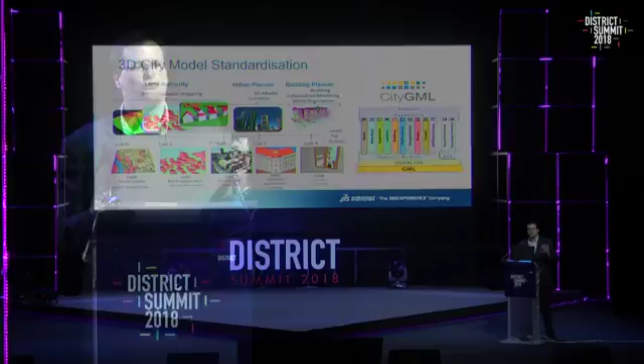It's what we mean by the terrain. And the terrain is very important for most cities because it's describing the elevation of the land use. So you can start to simulate flash flooding, you can start to simulate a lot of things such as excavation. So the terrain is very important because with the terrain, you have access to the road network, you have access to the green area, the blue area, and you can start to do your planning from an urban master plan perspective.

After, you have what we call the city in white, level of detail 1, meaning that you have the correct geolocation of the building, X, Y, Z, and the correct elevation. So you know where the buildings are, and you start to have some information regarding positioning. With that kind of building, you can do some wind simulation, noise simulation propagation. So you have a level of detail that supports usage to be much more innovative when you want to deal with problem solving.

After, we jump to what we call level of detail 2, and it's starting to be very interesting because when we are describing a city in level of detail 2, it means we have information on the walls and we have information on the roof. And when you have information on the roof, you can start to simulate the solar potential.

LOD3 can add some other information in terms of semantics because you have some architecture details, such as the windows, such as the doors. So now when you click on a building, in a virtual world, you know the story, you know the lot, and you can know some information such as solar exposure or people that are living in that apartment.

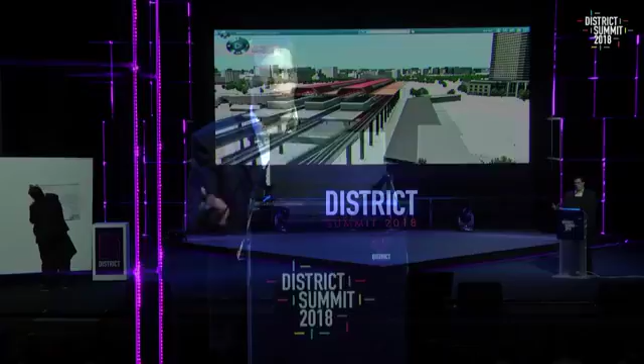Pay attention at the MRT station that is in the middle. At the moment, it's in LOD1. We put it in LOD4, meaning that now we can go inside. And when you can go inside, you can experience in a virtual environment what will be the experience from a citizen willing to take the MRT.

And you can change a lot of things. You can change the way the panels are put in place. You can change the landing, the unlanding. All the information can be simulated.

This is very interesting for your urban planning environment or bureau. You put the master plan, so you aggregate all the information from the legacy system into a 3D environment. To get a sense of this information, you can superpose it with information coming from satellite ortho pictures. You can put texture on the building.

Now it's very interesting because you have a referential of that city that can support scenarios. First scenario: analytics, semantics. When you select a building, as I mentioned already, you have the window, you know the solar exposure, you know the address, you know the elevation, you know a lot of information. You have also access to what we call the standard information.

So when you select a building, you have access to the volume of that building. It can be linked to some initiative strategy. But you also have access to the roof area—very useful information when you want to deal with solar panel potential.

When the information is not in 3D, it's not a problem. Look at the car park: we know how many car lots we have on a dedicated parking, and then we can start to support a smart parking initiative.

When you have this virtual representation of Singapore, you can deal with simulation. The first one will simulate a gas leak. We won't see the gas leak as a physical simulation, but we'll manage the impact of this gas leak on the surrounding environment in order to plan the evacuation.

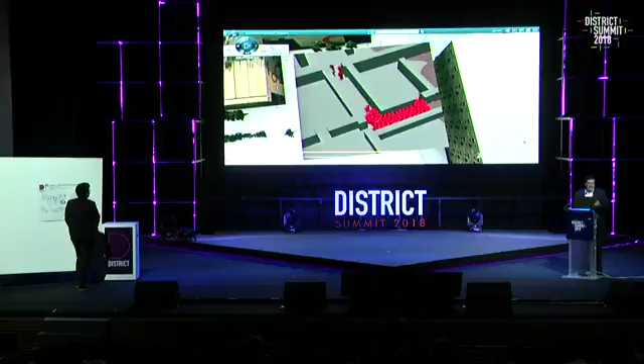It was mentioned this morning, but when you have a walkable model, then you can do what we call a behavioral simulation. You put a behavior to people in the virtual world and simulate an event. Here we're simulating a fire event, and we see how people are reacting, the level of stress, the families trying to link together to escape.

Last but not least, wind simulation. This is very important in Singapore, because temperature is 30 degrees all year long, and humidity is 90%. When you start to have this wind simulation in your planning job, you can take benefits of what we call the natural cooling effect.

So roughly, this is the first view of what we do in a virtual world for Singapore. And now, when you have this virtual twin, you can start to play other simulations.

The first thing is accessibility. This morning we were talking about topics—first one was mobility, second one was environment. For mobility, there is a law in Singapore that says everybody must be within 10 minutes from public amenities.

So here we have a path planning: I can walk, easy, I can cross. And now I'm a disabled person, so I'm in a wheelchair. The time to reach my community center in the middle is now 20 minutes, and it's more than 1 kilometer. So how do we put innovation to design a new district and a new way to move in that district?

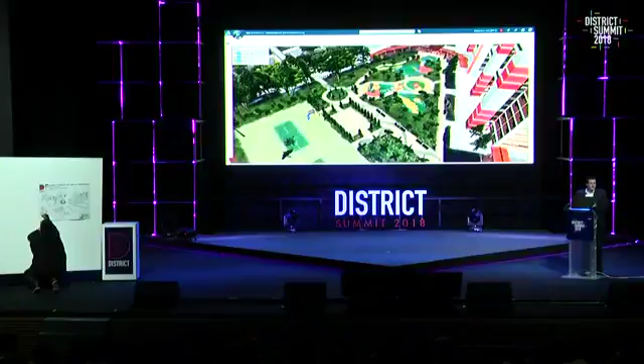So in a digital world, let's say I'm an urban planner in charge of mobility. What I can see is I have access to all my tasks, my virtual environment, and I can be notified that the town council is looking at a new project for a city garden. In the virtual world, I can put the project in my environment, start to navigate inside, and see the impact.

I can remove the trees—everything is an object—and I can see that my pedestrian overhead bridge here may have an issue, because I'm in charge of mobility and I need to put a ramp on all the pedestrian overhead bridges to ease accessibility. When I'm doing that, it's not commissioned yet, but in the virtual world I can see the impact of my ramp on the surrounding environment.

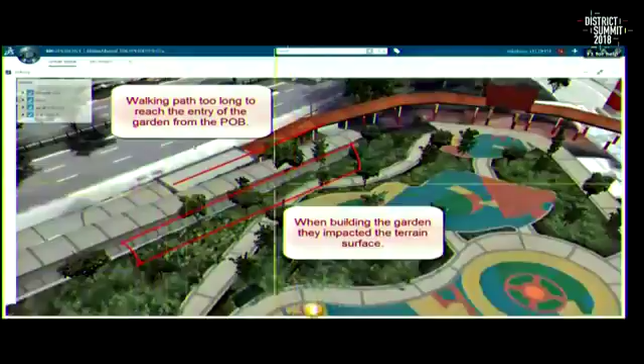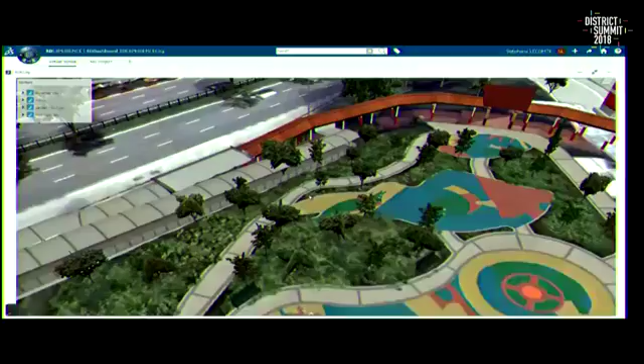And I can start to launch what we call virtual collaboration, to enable people to share information and lead to a better solution, taking into account regulatory compliance. I'm compliant because I can do things, so I'm collaborating—I have access to all the projects. This is what we call life cycle management. We also have access to all the rules.

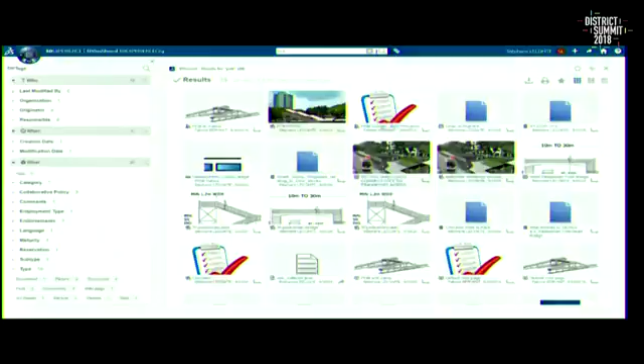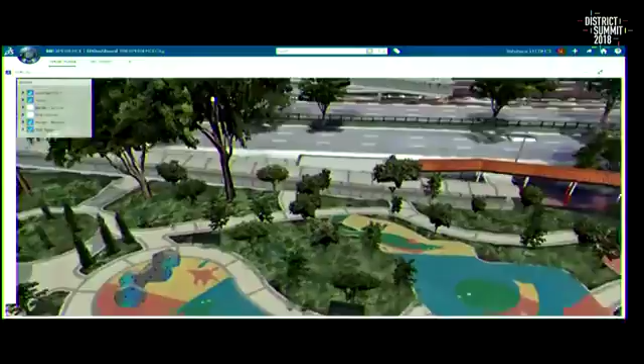So when I want to take benefit of many initiatives, here I'm connecting to Virtual Singapore, and you will see the solution that has been deployed in respect with the regulatory compliances put in place in Singapore. And the solution is very simple: 2 new paths in the garden and 2 new openings on the ramp. This is the result of a collaborative work.

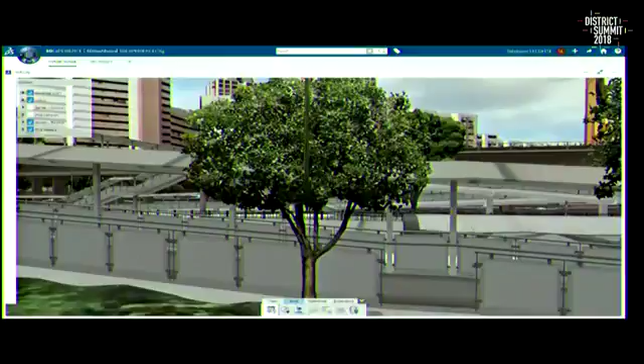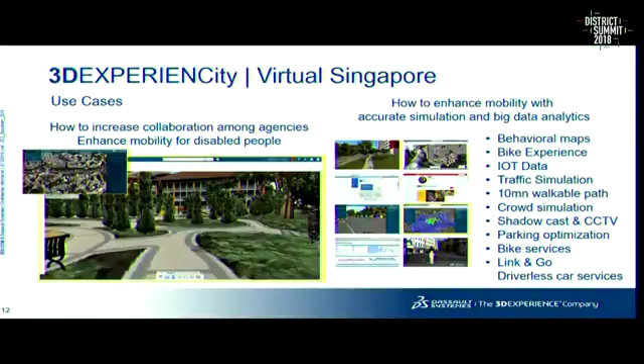And after, the benefit is that you can use the virtual environment that was used for the planification, for the citizen communication and the citizen mediation—because you have the virtual park with the virtual amenities and the virtual environment.

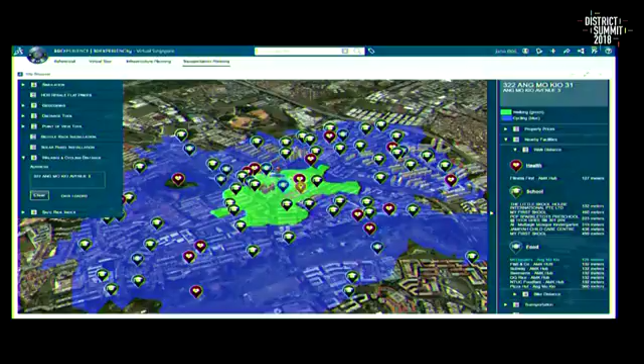Very important when you want to plan is you need to have what we call isochrone, linked to mobility again. So let's imagine here in green, what we did, we digitalized the law. In green, you have what you can access in 5 minutes by walking, and in blue, by cycling. You see, it's not a circle, it's what we call an isochrone. And it enables us to start to link, to deal with planification.

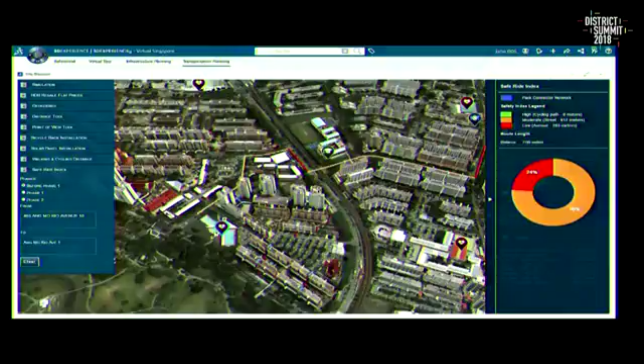So here, we have what we call in Singapore a car-lite initiative, and you can have access to a safety index for the path to move from my house to a community center. And you see that when you take into account the different phases of the plan for mobility, you see the impact on the result.

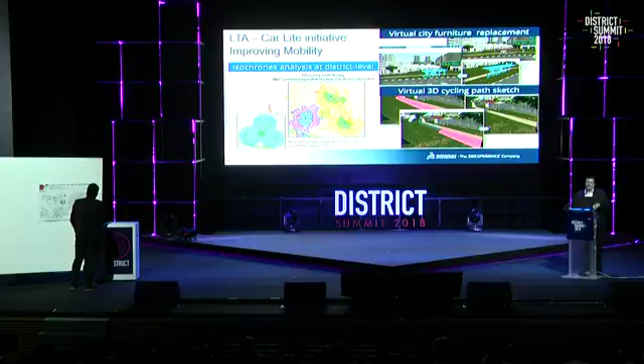Another initiative based on that isochrone: if you look at the bottom left, when you do planification, generally speaking, we say what I can reach in a given amount of time is represented by a circle. But when you do so, you don't take into account the bus stop, the underground tunnel station, underground path, whatever. So you don't have access to the real accessibility of your district. You see that if I do my planning using a circle, I'm in a perfect world, but in the real world, with the isochrone, I have a hole.

So I'm using this environment to compute what needs to be done, and after I can virtually commission new city furniture, bus stop, but also a new cycling path.

Linked to smart campus, so we'll move to the environment side, it's no more mobility. What can we do in the virtual world with green energy?

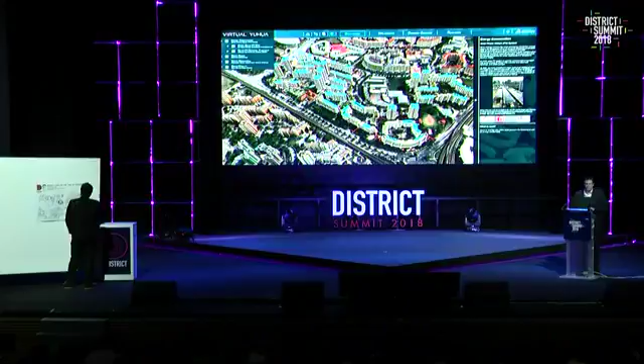We digitalize the solar panel. So for a district, the town council can have access to the solar production and also the electricity consumption from the common parts, the lift and the stairs and the light for the park. And you can learn from experience.

You can see, okay, now what if I want to replicate this solar panel initiative in another district of Singapore? And because we know the position of the building regarding the sun, we can assess a solar potential and help the decision process to say whether or not it is cost effective to deploy solar panels in that area.

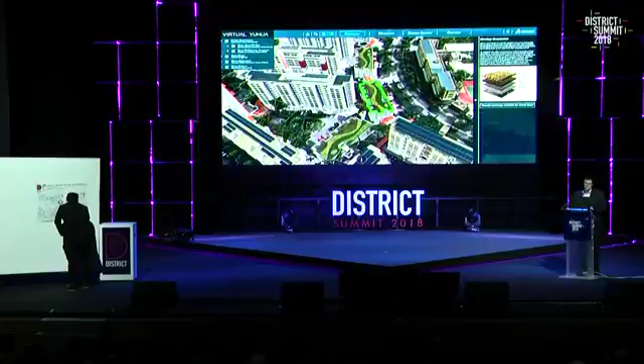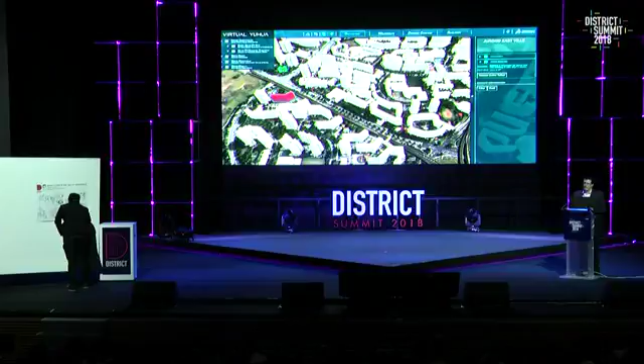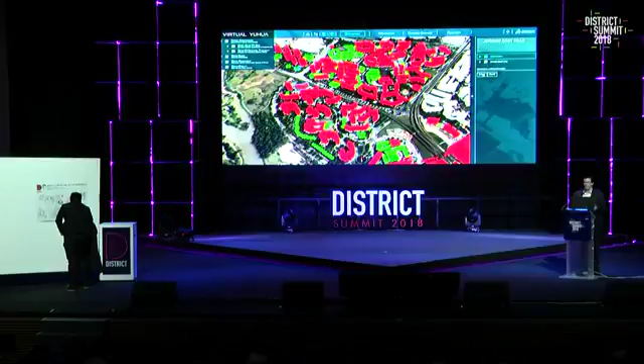Here, we digitalize the rules again. When you cannot put a solar panel by law, you can put a green roof. And now we can have access to a rules-based master planning saying where are the buildings that are candidates for a green roof. In a matter of clicks, you can see all the green candidates where I can put and deploy this kind of initiative. It's very helpful for master planning in order to deal with that kind of environment.

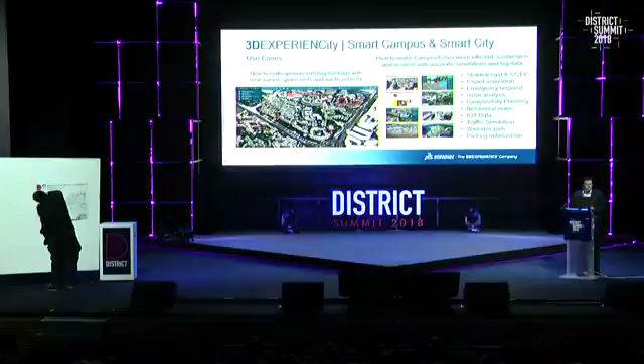Here, it's what we call a pneumatic waste collecting system. So to ensure that all the public housing of Singapore are connected with pipes in order to collect the waste to a central repository. In the future, it will optimize the use of the fleet in order to take care of the waste.

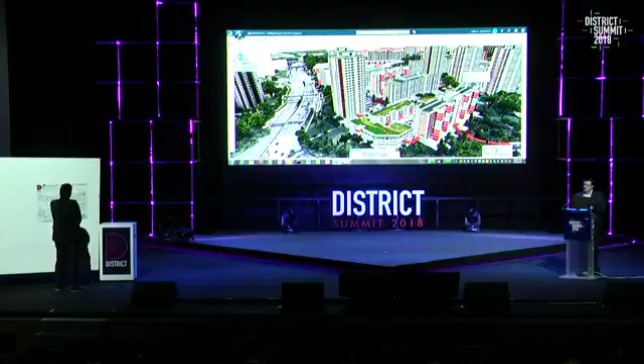When you have this virtual model at the district level, when you want to link with security and safety, you can simulate the field of a CCTV network, and you can help optimize the position of a camera based on the elevation. You can also simulate, as you saw previously, the season, and you have access to the shadow. Everything in a virtual environment.

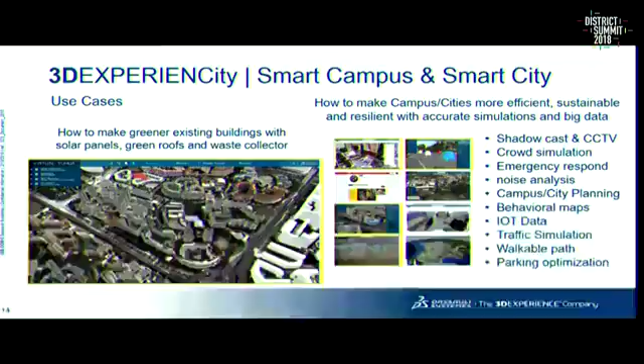Last but not least, simulation. So here we are working in partnership with Singapore University and Research Institute, and you have the result of a traffic simulation in a district, and you can go at the pedestrian level to have fields on the congestion.

On the safety: can I cross the road at that moment? Do I have enough time to cross? Because in Singapore, all the traffic lights are connected, so when one is red, there is an impact on the network. And you can simulate these kind of things.

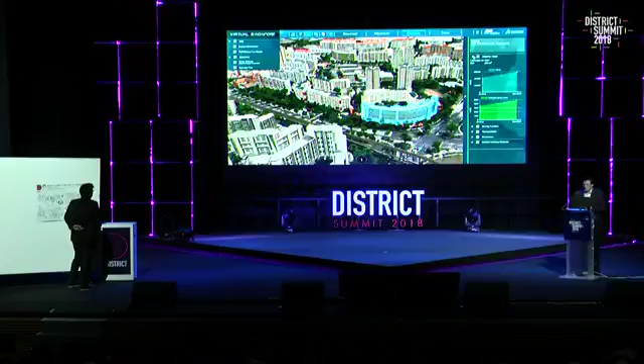Back to simulation. I don't know if you have it in Thailand, in Bangkok, but in France, we have it also: we are managing all the transactions on property price. And here, what we are doing, we are aggregating all the information on the price transaction for a dedicated building, and we can compare the price based on the different stories, and you can detect some patterns.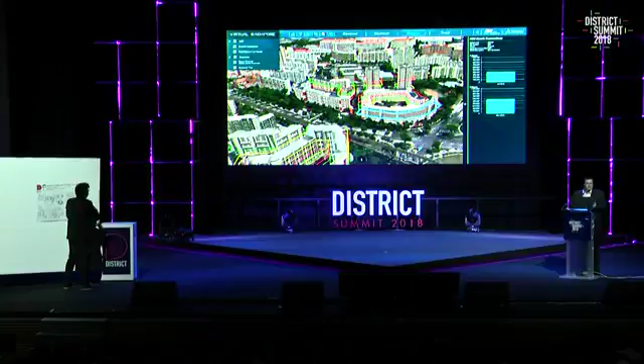And you can, after, play other simulations to enhance the way you want to deal with the district plan in order to attract newcomers. You need to find the cause why there is a drop in the price, so you can aggregate multiple simulations. Here you see that you can have the simulation for the price and all the transactions. But now we jump to what we call a noise simulation based on sensing data, because we have sensor data on the smart light, smart lamppost in that city.

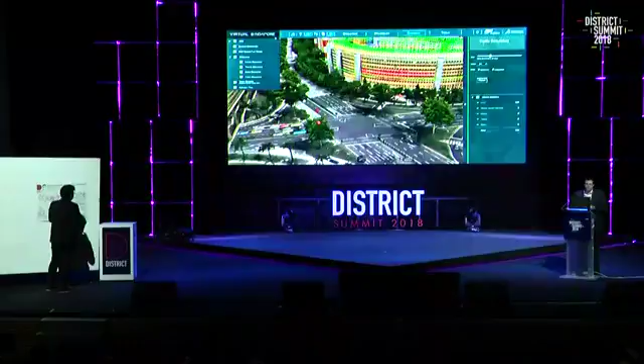So we are able to aggregate all the information on noise. And when you put the price evolution, the noise simulation, plus the traffic together, you can detect things to be done at the master plan level.

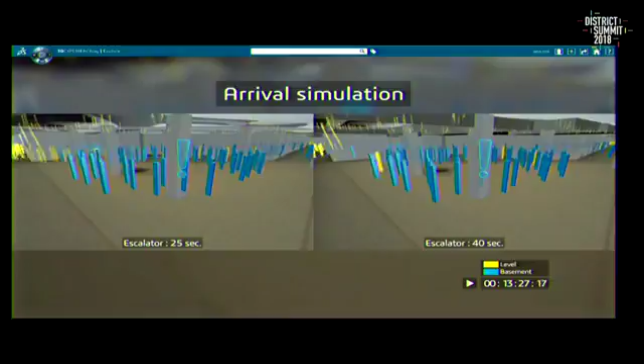Back to the walkable model. This is a shopping mall in Singapore, and here we simulate the way people can come to an event—a positive communication, a positive event. We simulate, based on the speed of the escalator, the way people will move from different stories to reach the event at the basement level. You see the result and the impact of the escalator speed in order to reach that event, and it will help the planner for the event optimize what needs to be done.

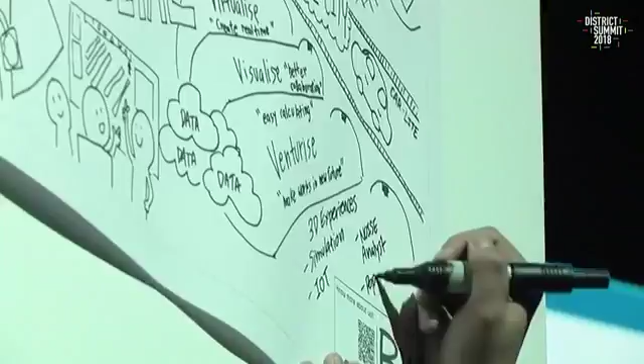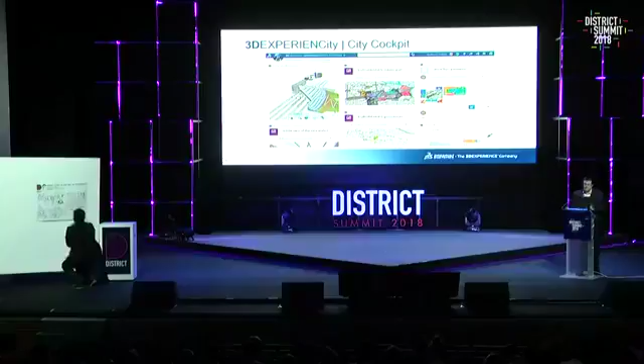Another example—now we are no longer in Asia, we've moved to a city in France. As mentioned this morning, it's what we call dashboarding capability. Here I'm talking about what we call a city cockpit. A city cockpit is a way for a dedicated urban planner, architect, or transportation engineer to be connected to a single referential with access to a lot of information.

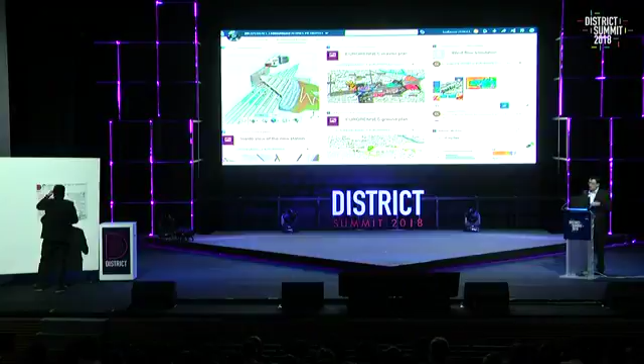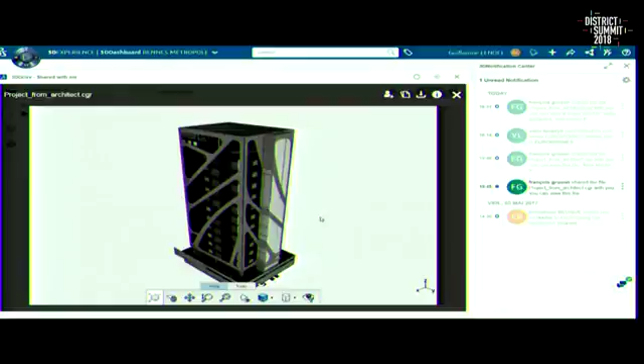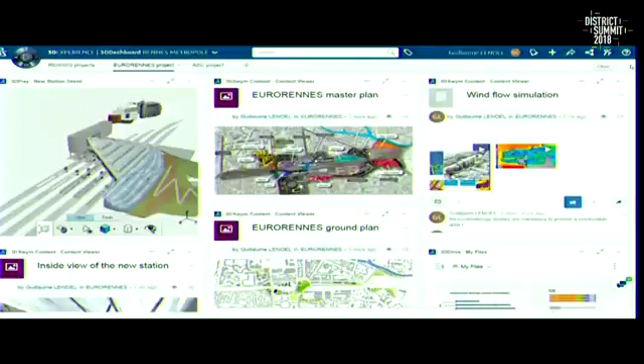Here you see I have access to a new train station project—the master plan, and the different simulations that have been launched on that area. The master plan is digital, the simulation can be run, and it's a collaborative platform. I can retrieve the work done by an architect and import it, so here you see the 3D building. I can see the impact of that building in my existing planification—this is a virtual collaboration to put this building in place in my virtual city.

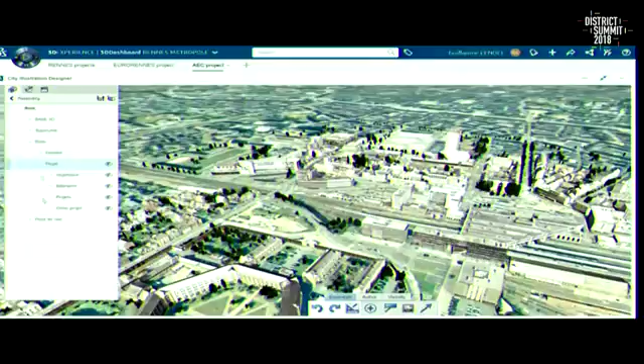This is the city of Rennes in Brittany, France. You see the MRT station. I can start to access the block—the existing city as of today—and then put in place all the projects commissioned by the city in the virtual environment, and see the impact of my building on the overall planning goal.

What's being done just now, used by the city of Rennes, is they are preparing what we call an illustration, so you can capture a viewpoint and create an animation to communicate to the citizens about the next evolution of the district. You see the as-is, and the to-be as planned, using mixed-use buildings that have been approved and will soon be commissioned, and you can start to navigate in that environment virtually.

My takeaway is very simple. When you want to deal with innovation in a city, district, or building environment, our view is that you need to describe the city as a system of systems. This comes from our military background, dealing with aircraft engineering and similar things—we call it mission-critical software.